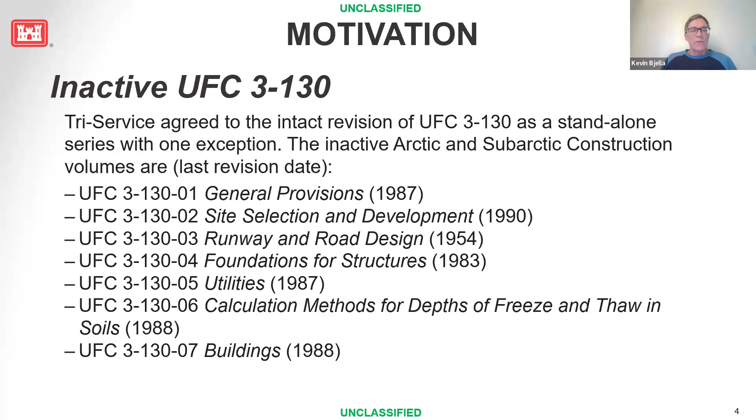We folded calculation methods for depth of freeze and thaw into Volume 1, and Rosa will talk a little bit about that. Site selection, that's the volume that I revised, and that's still basically the way it was. Volume 3 is foundations; WSP will talk about that. Volume 4 is buildings; Wade Lein will talk about that. And utilities was Wendy Wieder. Next slide, please.

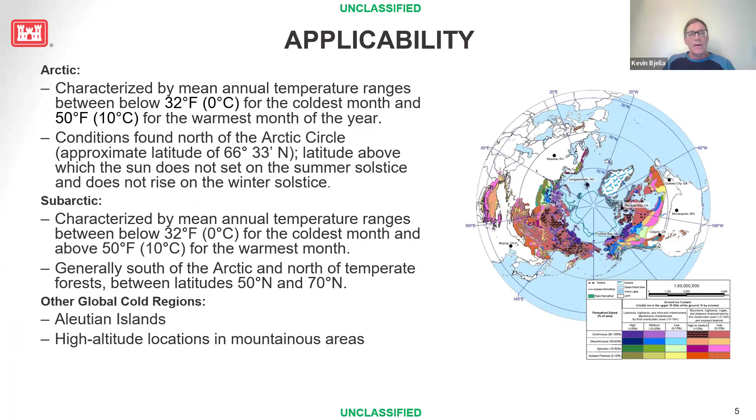And applicability, I'm going to turn this over to WSP to let them tell you from the industry point of view their standpoint on this. Thanks. I think this one's mine, Kevin.

It's Mark Musial. I'm in our office with Andrew Daggett. I have to apologize. We're having video problems here. They may even start while we're in the middle of talking about this slide.

We'll see. But so one of the first questions with any code is what's it applicable to, and what regions is this applicable to? And as everybody here knows, there's multiple definitions of what sort of Arctic or subarctic, and how do we define them? Is it circumpolar? There's many different terms for it, and ERDC and CRREL arrived at this general definition of applicability.

It's northern areas. The Arctic's northern areas. Generally, it's permafrost areas, but not always. And then it goes down into the subarctic areas, which arrived at basically north of 50 degrees. Which is pretty fair, but I think it also applies to places like the Aleutians, high altitude, mountainous permafrost. There's all the stuff in Tibet and southern Siberia.

Anyway, it's applicable to a lot of areas, and another place is there's elements that we talk about in this criteria that are just applicable to cold regions in general, and that's areas of deep seasonal frost. And so there's concepts and ideas that are included in this that are relevant, even though they aren't strictly applicable. I guess I'll turn it over, John. You want to advance?

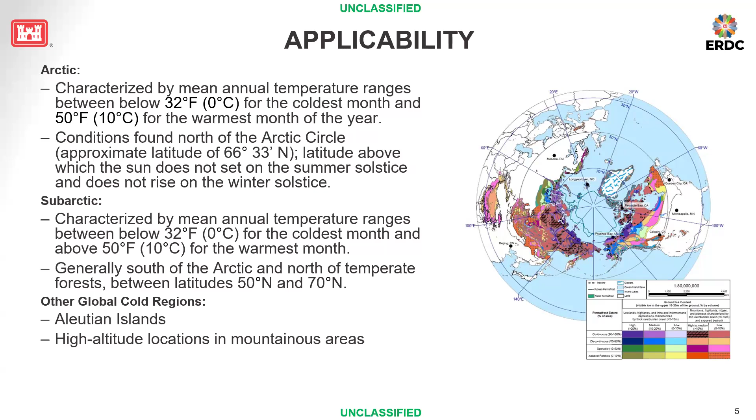Thanks, Mark. I think one of the key pieces to understand and take away from the UFCs is they draw a lot on the International Building Code. And so when you look at UFC in general, it cites back to the building code where it makes sense, and then where there are special considerations, the UFCs take those on, whether it be a special facility or something that's unique to DoD works.

And the goal of the UFCs for the cold regions work that we're discussing is to draw on the IBC, but also show some of the differences and some of the challenges that a typical design engineer may not be thinking about if they get a project, say at Fort Wainwright or Eielson, or somewhere where there's deep-seated permafrost or deep seasonal frost.

And one of the other goals is to provide references for engineers to really understand and dig into cold regions engineering practice. So we weren't trying to develop a series of manuals that are explicitly design guides, if you will, but provide references and information that engineers practicing in cold regions would be able to draw on to dig further into as they're working through planning and design.

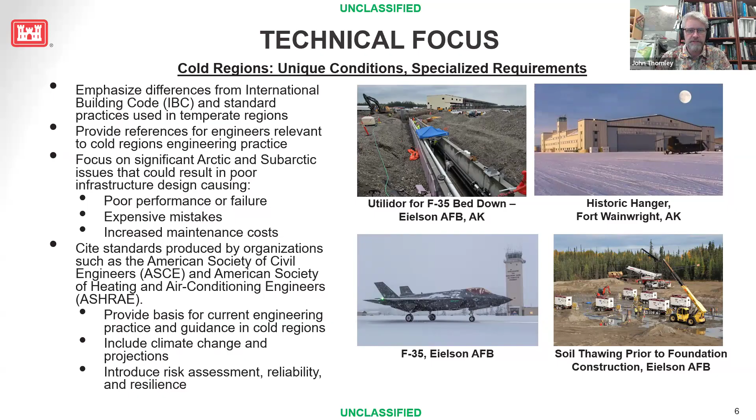All right. As Kevin alluded to, we now have these 5 volumes, and these are the new names for these volumes. And we've listed the corresponding lead author for each of these. So the UFC 3-130-01 is now titled Arctic and Subarctic Engineering. This one serves as an introduction to the Arctic and Subarctic UFC series, and I led the revision to this volume. But there were a lot of contributors to this for sure.

The UFC Volume 2 is now titled Arctic and Subarctic Site Assessment and Selection. This volume provides technical guidance all about technical site assessment, and Kevin is the lead author on that, and he'll talk more about that in the next few slides.

Volume 3 is now titled Arctic and Subarctic Foundations for Freezing and Thawing Conditions. This guidance applies to horizontal and vertical foundations, as well as considerations affecting foundation design and construction, and also highlighting monitoring of facilities too. This was done again with our colleagues from WSP, which is great to have them helping us out through the contract with Alaska District, and they did a lot of technical review of other volumes. Alaska District is really helpful in a lot of these revisions.

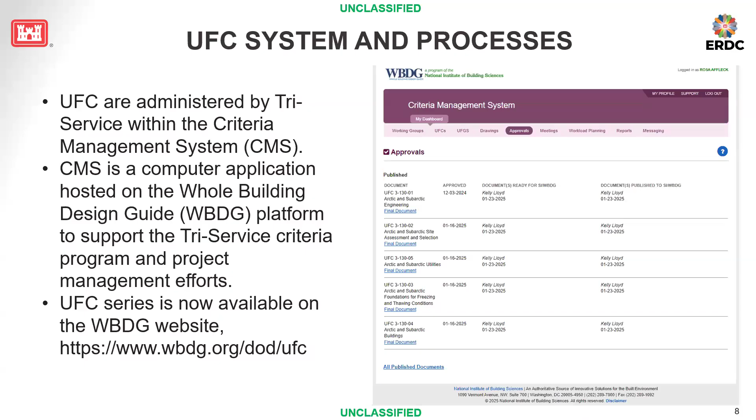So, as John alluded to about the content of the UFC, the new Volume 1 lists the standard practice used in the temperate region because it's part of the format that Tri-Service, as Wendy alluded to, requires us to follow when we do our revision. So we basically have to enumerate the temperate UFC, but more importantly, we really highlight a lot of the classical cold regions infrastructure problems, such as settlement due to thawing foundations, effects of frost action or frost heave, the influence of salinity on frozen soil properties, and the implications for foundation engineering, earthwork, and other aspects of construction.

So this volume also includes a lot about cold regions engineering, design, and construction in locations that have extreme low temperatures. So those extreme zones with freezing and thawing, and other fluctuations, snow and ice, frozen soils, and many other cold regions environmental and ground considerations. We've included the implications of changing climate. That's for sure happening in the Arctic.

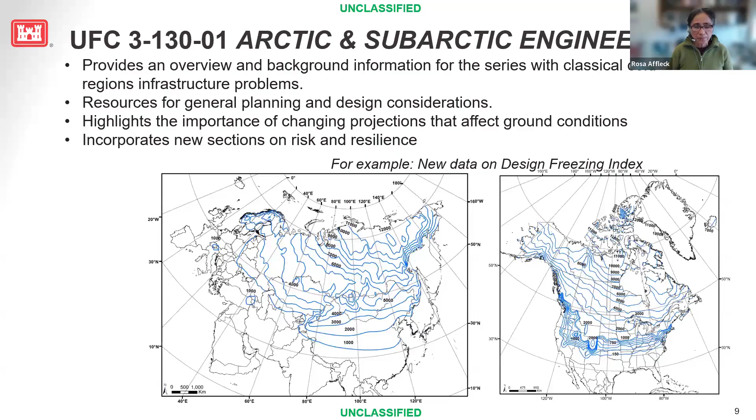On this slide, you can see some examples that we've put in this volume to look at design freezing index using current data. And so we've really tried to incorporate a lot of new materials in the volume. And that's what I have for Volume 1. Over to Kevin.

Okay, thanks, Rosa. So I revised Volume 2. This actually started with a previous project that I had with SERDP, looking at better ways to characterize permafrost, better methods and assessment techniques. And so something that CRREL has been doing for quite some time, for decades now, is working with surface-based geophysical methods, radar, resistivity, those types of things. And so that was a big part of what I brought to this volume.

This volume was very much out of date. I think it was called Site Selection before, and that utilized mostly photo analysis and photogrammetry techniques. I don't even think it talked about terrain analysis. It predated some of the terrain analysis methods that were devised for the pipeline. So it was woefully out of date. So it was time to bring this into the 21st century.

And basically what I did was take a look from the 30,000 foot level, basically the desktop level, down to subsurface, where you would actually be perhaps drilling a hole or doing some soil sampling. That was the methodology that I utilized. And of course, a big part of that characterization, we believe, should be geophysical techniques. So next slide, please.

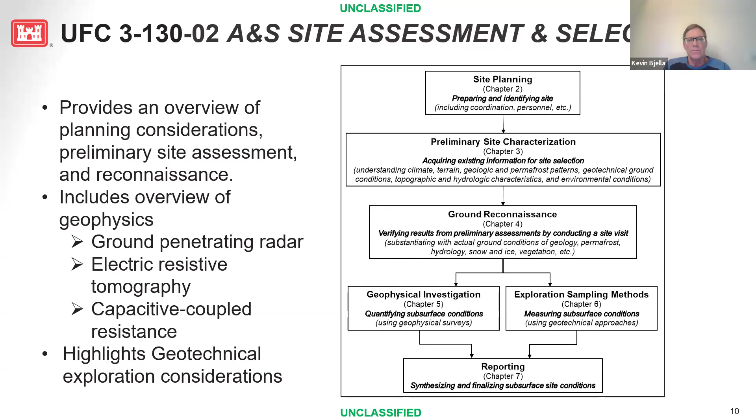So we go through quite a detailed assessment of what can be done and how to get from that 30,000 foot level down to that sub-centimeter or centimeter level at the subsurface, depending on what type of project it is. Is it a vertical construction project? Is it a linear infrastructure project? What type of materials are you going to be investigating? Because that has implications on drilling techniques and the drilling tools that you might have available.

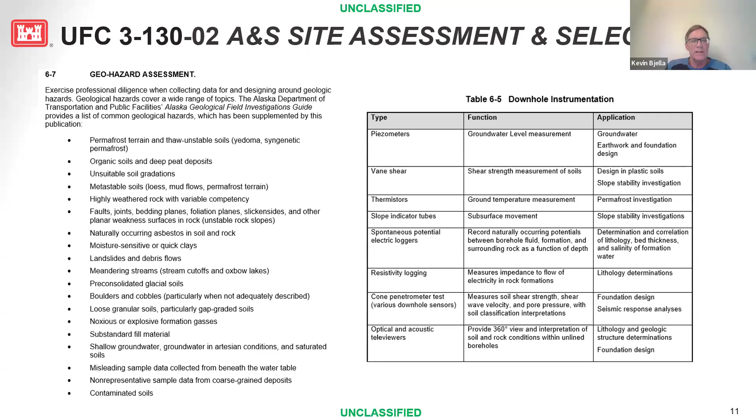So this volume goes greatly into depth of how to go from that desktop assessment, pre-field visit, all the way down to actually putting soil in a bag or in a core, and then getting engineering properties from it. And I think I'll just hold that there. If anybody has any questions, please ask at the end of the seminar, but I'll pass it on to WSP now. Thank you.

Hello, this is Andrew Daggett. So once we have the information that we collected in Volume 2, we need to then move into the design stage, which in this one, since we're covering Arctic and subarctic areas, we have a wide range that we need to cover. First, we're going to cover our standard foundation design for freezing and thawing conditions, where you're going to have a frost protected foundation. And then in addition to that, with our Arctic conditions, we have to worry about permafrost. So how are you going to design a foundation in permafrost to keep everything frozen?

So this manual provides a broad overview of several topics which would be important in the design of the foundation. So first, it would be how you're going to use climate. What's the best way to use the new changing climate information? What should we be looking at? And then with that, what does that mean for our ground temperature regime? Are we going to be seeing a significant change in ground temperatures that we need to consider in our foundation design? So a little bit on the numerical modeling.

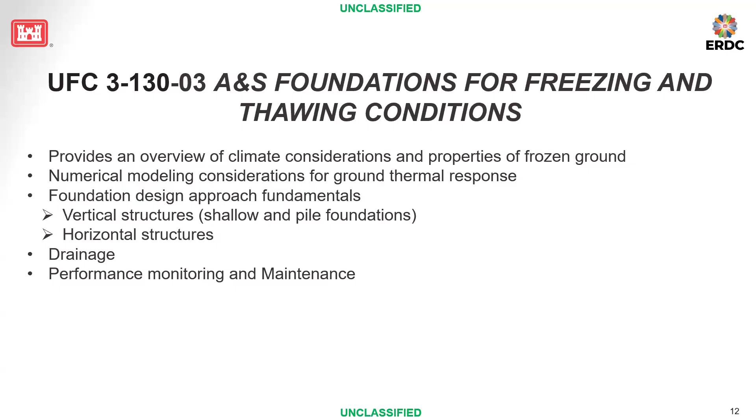And once we have an idea of what the climate and the ground conditions are going to do, we touch on the actual foundation design pieces, what should be looked at for vertical and horizontal structures. And then we have sections on drainage, and then performance monitoring and maintenance. Next slide. Then Mark is going to discuss this one.

All right, thanks, Andrew. So what you have here is a flow chart, basically, that outlines how the volume is organized. Now, it starts up with the high-level issues of any site, because this is designed for both permanent facilities and temporary facilities, like with expeditionary forces, I'll say. So, it's taking a look at some of the high level items that have to be thought about.

It goes back into the site investigations, and you get into this sort of loop about how the site investigations are informed by geotechnical engineering concepts and thermal analysis and design issues. And that all comes down then again to some preliminary foundation engineering. It wraps around looking at alternatives and whatnot. Maybe you'll need to do some additional investigation for a real significant facility. Maybe you really don't need to do anything for someplace where you're going to be for a month in the wintertime. But it just is intended to show how there's this thought process that people can follow along.

It goes down then into the final foundation engineering and cost and functional analysis, might wrap back again into final design, and then construction, performance, and maintenance. And each of the chapters where those items are discussed are in there. Now, when we first started this thing, we were supposed to have like under 40 pages of text or under 50 pages of text. And this volume quickly grew into a large volume.

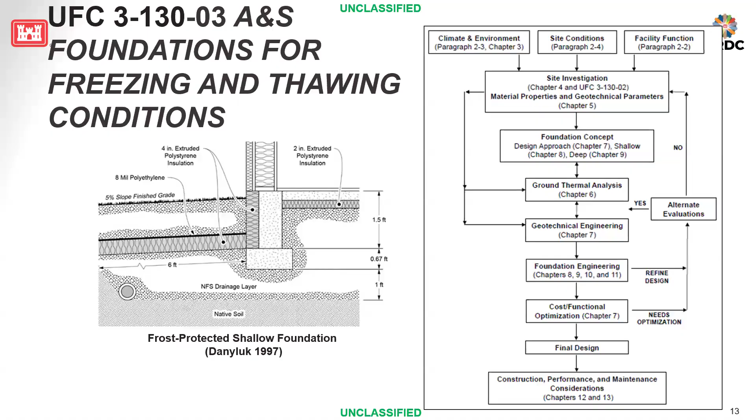Hello, everyone. The next volume in this series is the buildings volume. In this volume, we worked with the architectural discipline working group, and so it has specific considerations for architectural, structural, mechanical, fire protection. And really what we looked at in these sections were common pitfalls and things to consider when you're designing in a cold region. In the architectural section, they're looking at the building envelope and what kind of doors to use and things like that.

The mechanical one, you're looking at HVAC systems and things like that. The electrical one, you're looking at things like making sure you're putting outlets outside for vehicles, if they need to stay warm. Fire protection, that one's pretty self-explanatory. You want to design your fire protection systems to work in the cold, so you don't want ice coming down on your exterior outlets and inlets, and you also want them protected so that they don't freeze up.

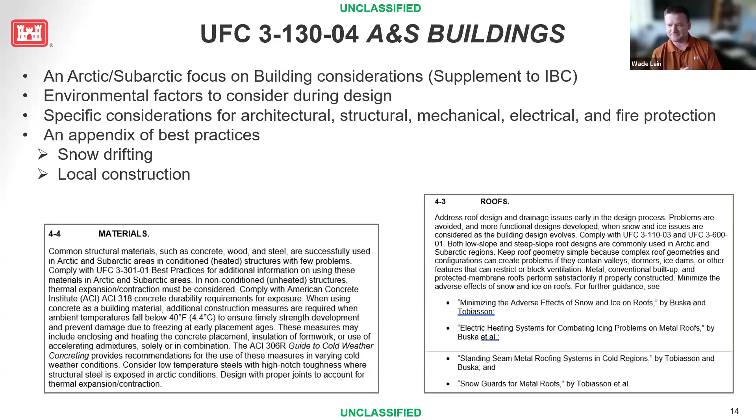There's different materials considerations. You can see one of the examples here for different types of materials and making sure they're compatible with cold regions. And then roofs, you want to design your roof in such a way that you limit and minimize snow accumulation and ice accumulation. All of those are things that we wanted to talk about in the buildings volume. And after that, I'll pass it off to Wendy with the utilities volume.

So for the utilities volume, the material that was in the original volume goes back to a 1970s conference that was held in Canada. It was a symposium on utilities delivery in the Arctic regions. That large volume of work went to the EPA and then to ASCE and the Army and produced documents such as the Cold Regions Utilities Monograph from ASCE. And then it produced the technical manual that was the predecessor to this UFC. So it was some information from the 1970s.

It considered all utility systems. And what we did in the case of the new volumes is separate it into hard criteria and best practice. Then we could use material that came out of, for example, Canada, where they use some best practices that aren't actually code per se. But this document does refer often to the ASCE Cold Regions Utilities Monograph, which is also currently under revision, and it does look at a wide variety of utility systems, from laying it on top of the ground to putting it into a utilidor. Next slide, please.

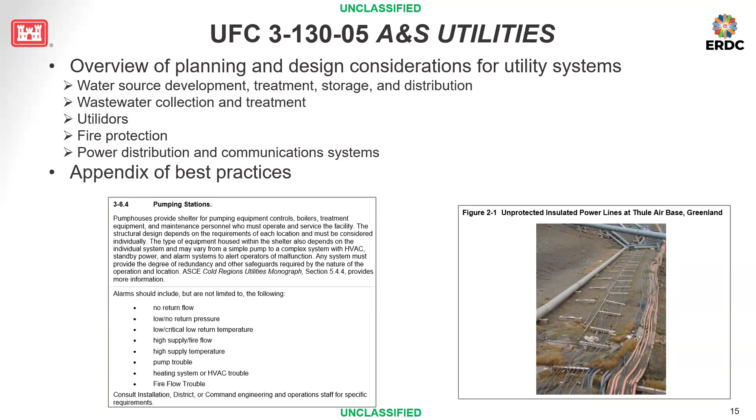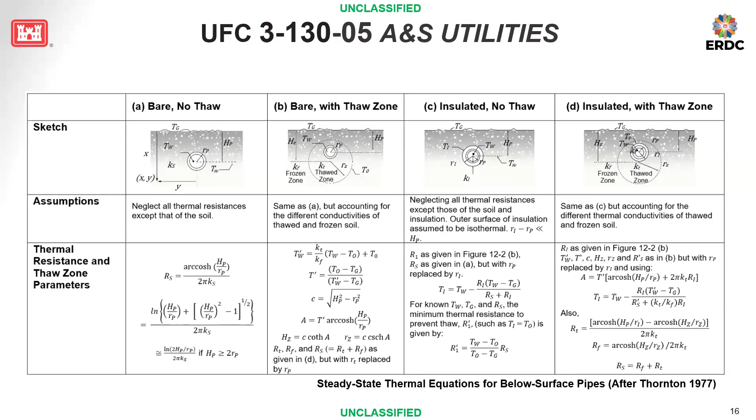And then we did take an opportunity, after talking with several different people, to step back and provide some of the basics that may be now in computer models, just to make sure everyone knows what we're going for. As we say sometimes in the government, a Florida design firm might get a new control tower for somewhere in the Arctic, and they don't know. We want them to know that they don't know, so they can come and consult with someone who understands and can help them through these issues that may be a significant problem to the utility system. And I'll turn that back now.

Okay. Well, thanks everybody for highlighting your sections there. I do have to apologize to everyone. There was a side project to this funding that we received, and that was to create a living guidance on permafrost temperature evaluation. So we had a contract with the Geophysical Institute Permafrost Laboratory at the University of Alaska Fairbanks, and Sergei Marchenko was providing his input on ground temperature modeling, something that they had been doing for quite some time.

They had a portion of Alaska codified utilizing existing borehole temperatures and then applying those to an average of 5 climate scenarios with different RCPs, one RCP of 4.5 and an RCP of 8.5. And this allowed them with different surface treatments, whether it's natural ground or gravel or even insulation added to a gravel pad, to be able to project permafrost temperature out to 100 years.